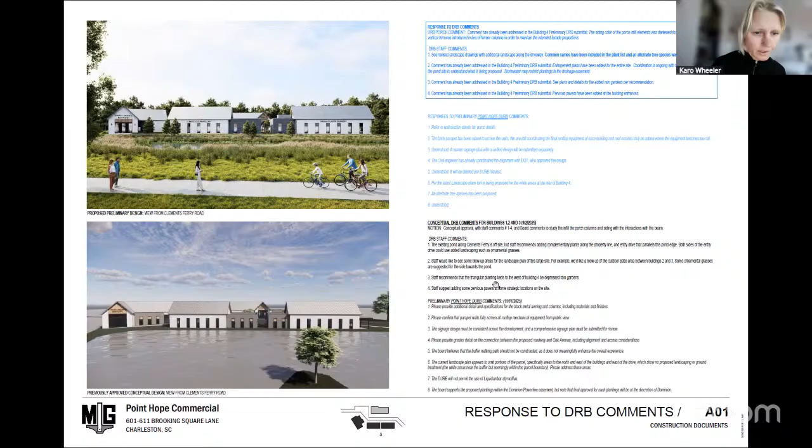So for these buildings 1, 2, and 3, we basically did the same, including the same changes as we did for building 4. From a landscape point of view, we have also addressed comments that we received in December and have added the common names to the plant list, and we selected an alternative for the sweet gum trees and used maples instead. So we can proceed to the next slide as I go through each individual building. Buildings 1, 2, and 3 are here to the south, facing Clements Ferry Road. Next slide, please.

Next slide, please. Here are the streetscape elevations. Again, the face towards Clements Ferry Road has not changed much, but I'd like to dive into each individual building to show the before and after elevations.

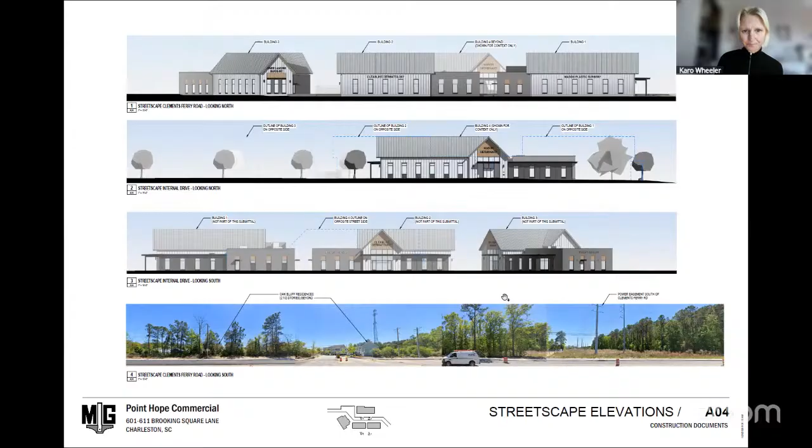We had already presented those materials for building 4 at the last preliminary submittal. Nothing has changed here. We only added the selection for our wall sconces and for the path lighting along the sidewalks. The larger wall sconce will be placed on the gable walls and the main entrances, and we have a more understated light for secondary entrances and egress doors.

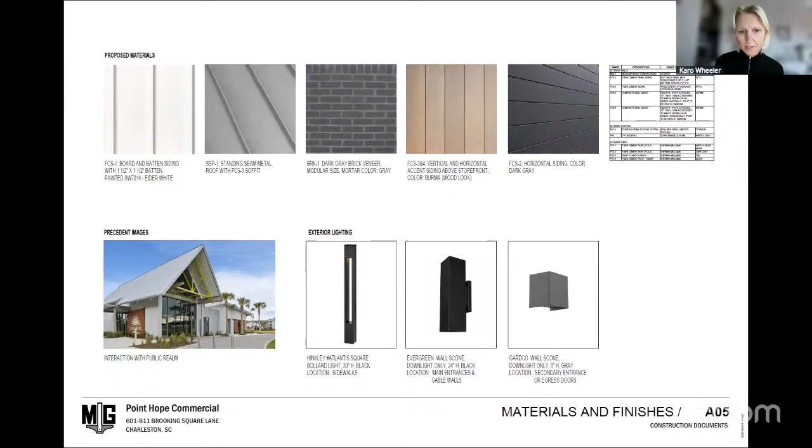We also had to include one change where we replaced the storefront glazing that previously extended up to the roof. We had to lower it because we needed to fit an ambulatory surgery center into the space. The lobby shrank, so it no longer made sense to have glazing all the way up to the roof. We replaced it with vertical wood look siding, just as we did for building 4.

At the bottom you'll see the conceptual elevations, at the top the newly proposed ones. Except for the color change, another change incorporated was the increased brick parapet, which we raised by 8 inches. Those areas predominantly hide the rooftop equipment. For building 1, we also had to add a roof screen since this is an ambulatory surgery center and the rooftop equipment is a bit larger.

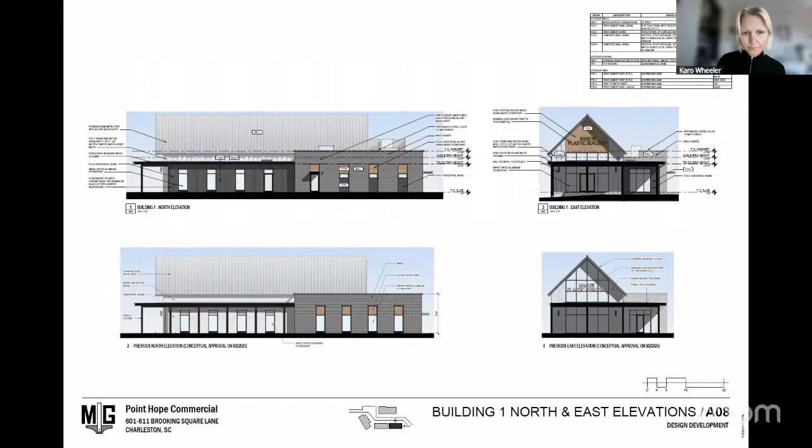Next slide. For the elevations facing Clements Ferry Road, they haven't changed much, as you can see. So we can move on to building 2, please. These are the building sections.

Next slide. This is building 2. At the top you see a comparison between preliminary and conceptual level. Here we also had to, unfortunately, reduce the storefront glazing that previously went up to the roof, down to 17 feet, and again introduced the vertical wood look siding at the main entrance. This way, all four buildings now have main entrances that are pretty much the same.

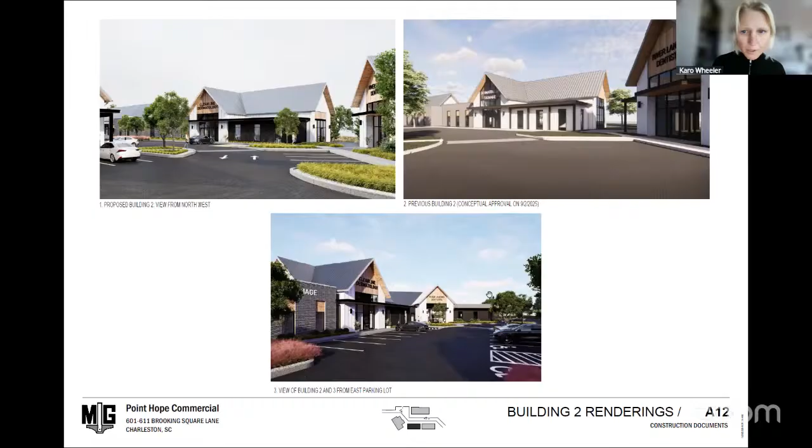Next slide. I'll move on to the elevations. Again, not much change except for the slightly higher brick parapets we introduced. To avoid an awkward situation where the gable meets the higher brick wall, we introduced a small hyphen, which you'll see throughout each building, so the eave of the gable can exist freely without interacting with the brick.

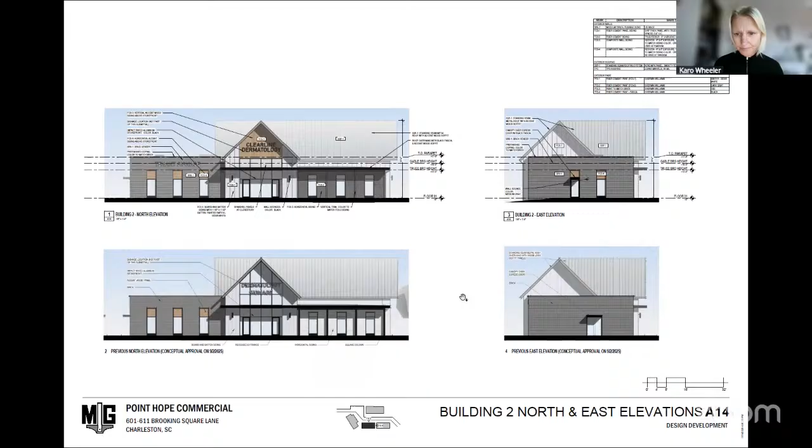Next slide, please. Here the only change is that one of the gables facing the courtyard between building 2 and 3 - we didn't want that gable to look like a main entrance since it really just houses a break room. So we reduced the wood look siding slightly to make this look less important.

These are the building sections again. Next slide. Now we should go to building 3, the last building here. Again, this is the change we introduced to the porch infill element. Next slide. Next slide.

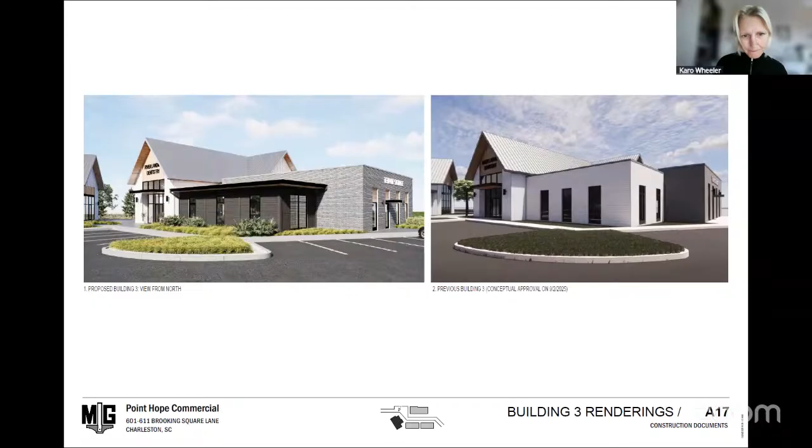As we go, if you could proceed to the elevations, please. So here, as I said, the owner requested a slight change to the footprint, so we had to elongate the building a little bit, but we still have the same elements - the gable elements, the higher brick parapets, and the porch infill. Just slight changes, but from Clements Ferry Road itself, you won't really see a big difference.

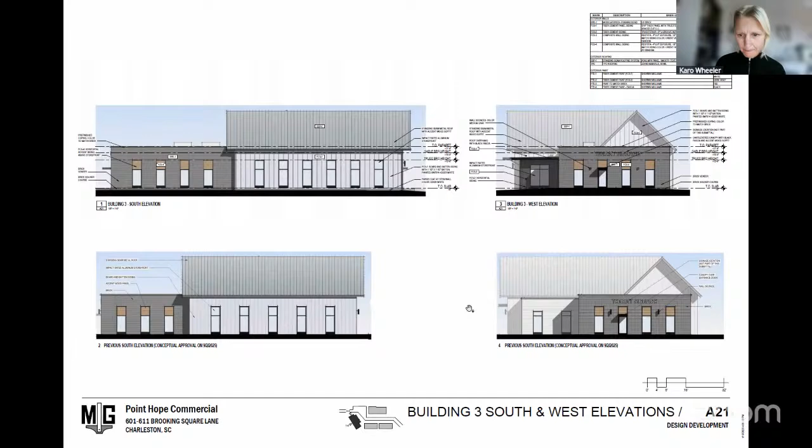Next slide. Now we're showing wall sections that basically apply to each of the 3 buildings. Here's the section through the rake of the gabled roof and the main entrance.

Just the eave detail, the brick detail with the recessed wood siding, and then our infill porch element with a slightly lower roof. The next slide shows the porch element that we have in building 1.

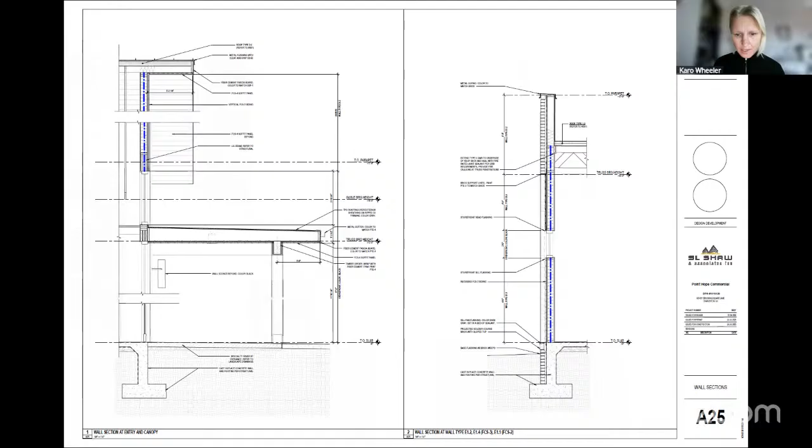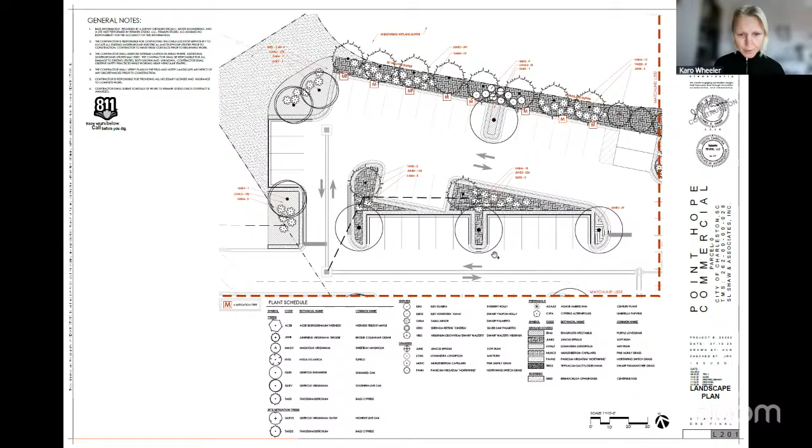I think now we can just move on to the landscape drawings. Again, here we included the common names for the plant schedule, and the main change was the reselection of the sweet gum species to a maple species.

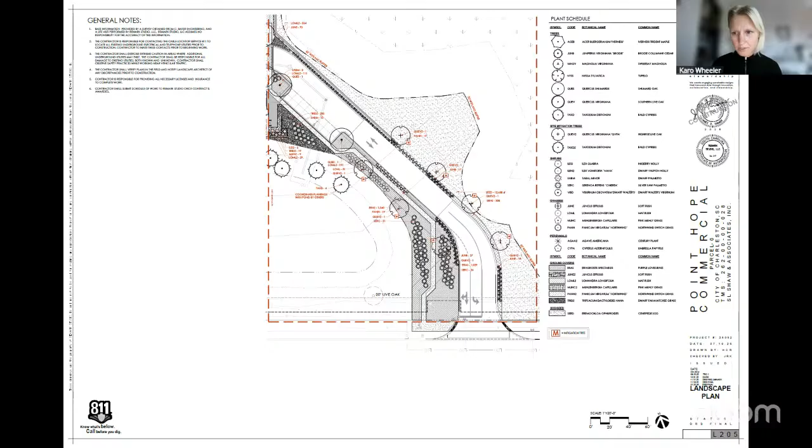With that, I'll have the board ask any questions if anything is unclear. We have our civil engineer Jessica Myers on the line as well, and Carter Ricks from Remark can answer any landscape questions. Great, thank you, Karo. Does anyone have any questions for the applicant?

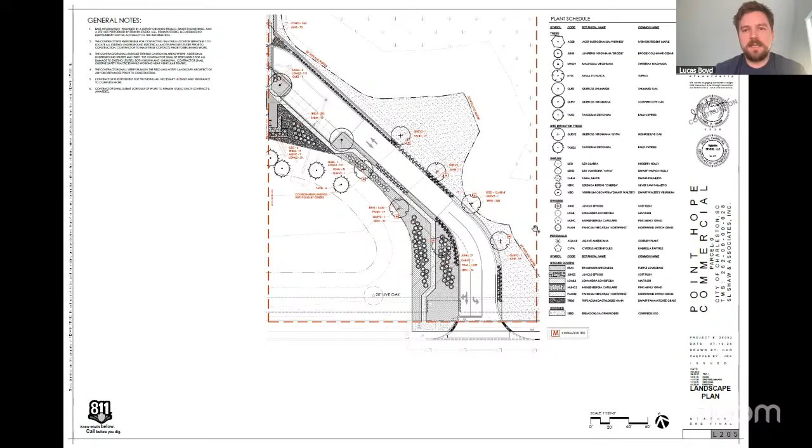I have a quick one. We talked about in the preliminary review for the other building, the change of plane with a material change. I know you had to go to the wood-like siding instead of the storefront at the entrances. I'm wondering if there's that similar plane change, or is it coplanar with the adjacent siding?

So when we are applying, there will be a change in plane. The wood siding will be recessed slightly, the same recess as you can see with the horizontal dark gray siding. In order to achieve that, we have to fur out the board and batten, and that way we can manage that recess. Okay, thank you. So we'll make sure that's also incorporated in the mock-up that we'll prepare.

I just had a couple of simple questions, you probably know the answer quickly. The mechanical rooftop units you mentioned, you had a screen, I believe it's building 1. Yes. I take it you guys looked at the different areas around the site, making sure that large unit is screened wherever you can see it. It looked like on the southern side, looking south, that it didn't have a mechanical screen around it. I take it the parapet is high enough at that point that you can't see it.

Yes, because the street is relatively narrow there. You could potentially see it when you're at the northwestern part of the parking lot. So we can look at turning that around and screening it from all 3 sides. But directly opposite the street, you wouldn't see it.

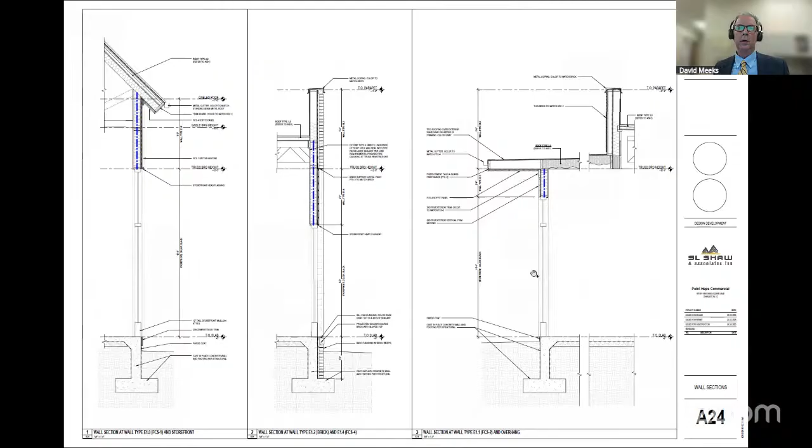All right, I think we are moving on as planned with the second agenda item. Okay, given the great time. All right, agenda item number two, 1647 King Street Extension.

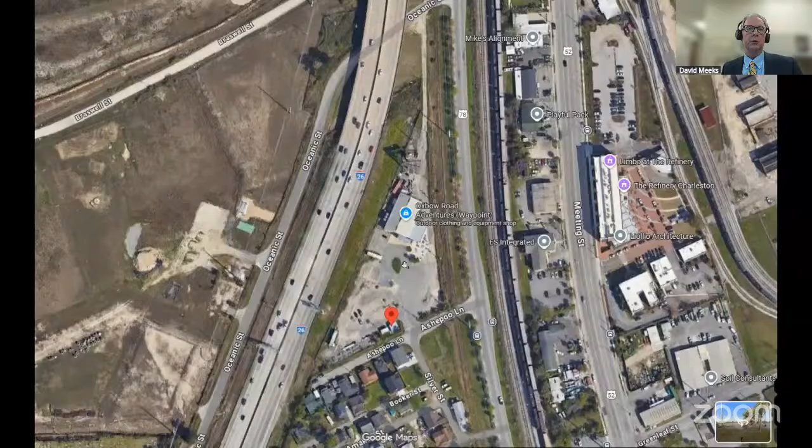Let's see, I have just a few context slides to show everybody where this is. If you see the red thumbtack in the Upper Peninsula, a little closer view. This is where the old Tradesman Brewery was, and it's across 26 from the future Magnolia development.

Closer view, this is looking into the site towards I-26. Again, looking into the site. This is the residences across the street, the site's on the right. And with that, I will turn it over to the applicant.

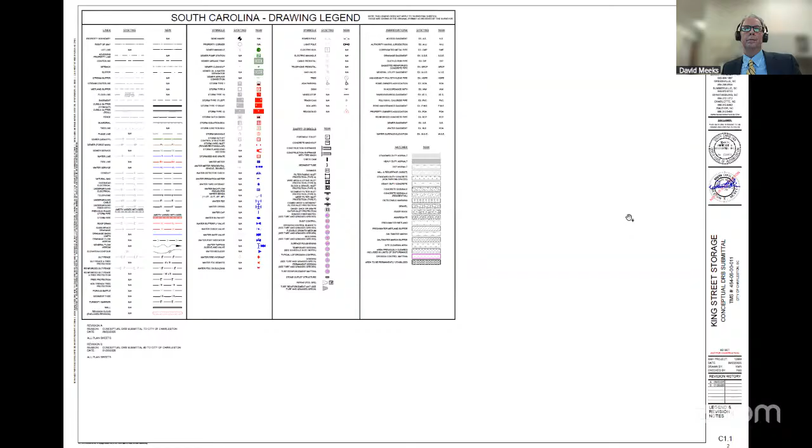Great, do you need more than 10 minutes? Losse, are you muted? Let's see, Losse or Lee? Okay, gotcha, can you guys hear me now? Yes. Losse, do you need more than 10 minutes? Bill, if that's okay with you guys, we'll try to fit it in 10, but we'd like to ask for an extension just in case. Got it. I think Seamon Whiteside and Kaylee Roberts will kick us off with civil and landscape.

And let me know when you'd like me to advance the slides. Hey, this is Kaylee, can you hear me? Yes, thank you. Okay, perfect. All right, if you'll go to probably just slide 8, I'll kick it off real quick with our previous site plan. You guys have seen this before at the previous conceptual DRB. The site layout wasn't exactly what we wanted, and there were a ton of building changes, so I'll keep it quick on the site side and toss it over to Losse after that.

Some of the comments we received were about how the building was placed against the residential area. So we switched that around a little bit and made it a nicer area beside where the residents will be. There's now, and Losse will go into more detail, a plaza area that we're really trying to give back to the residents, to be more inviting than just a big, large building. We've moved the building so that the parking is in the back, which was one of the suggestions from our previous conceptual DRB as well. It'll get hidden by I-26 because it's more in the back, and putting that together with the loading area, keeping it all a bit more hidden and more appetizing to the residents right there.

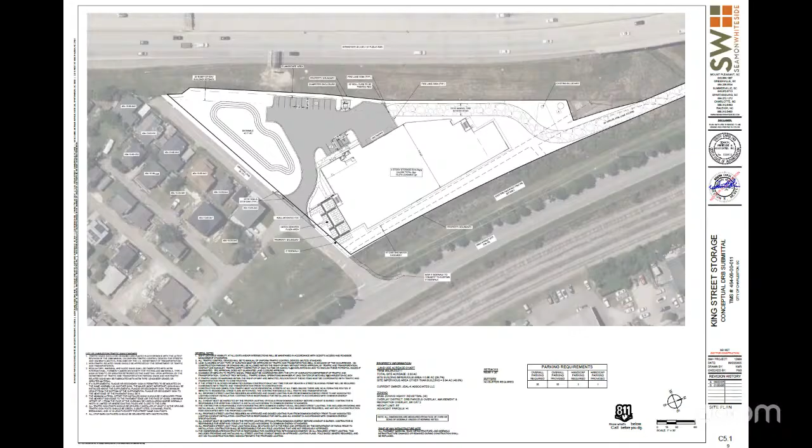Moving to the next slide, one of the comments we received on the landscape architecture side was not having quite enough trees on the I-26 side. So we've added a full landscape buffer area along the parking and pavement, allowing more trees there. There will also be landscaping, bushes and such in that plaza area, which Losse will talk about. I think that's mostly it from the site side.

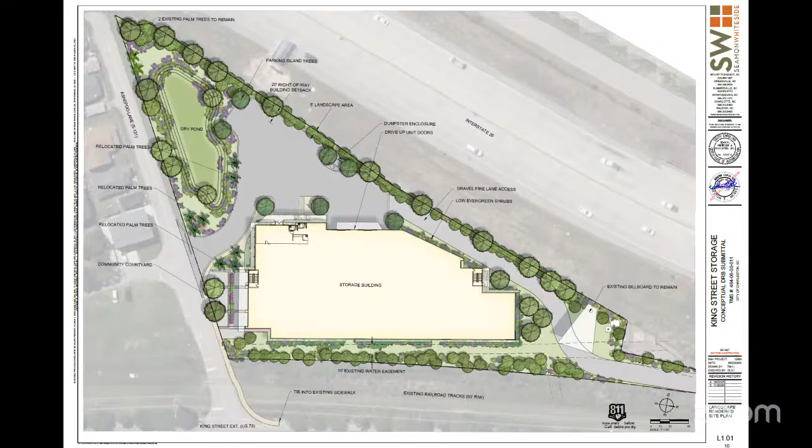All right, thank you, Kaylee. David or Bill, if we can go to slide 29. Sorry, I'm going to jump around a little bit here with the slides.

As LFK Architects is coming on as the architectural designer for the project, we're sort of starting over. I know you've seen some of the earlier conceptual presentations, so for our understanding we went back through the recent conceptual presentation from October, and pulled out the highlights we wanted to take away, which were staff and board comments.

Four primary comments came out of that. The first was that the project needed architectural direction or vision. The second was to be careful of the massing of the building adjacent to the Silver Hill residential community. The third was to consider having parking and loading on the back of the building, perhaps next to I-26. And finally, using landscape and canopy trees to scale down the massing of the building.

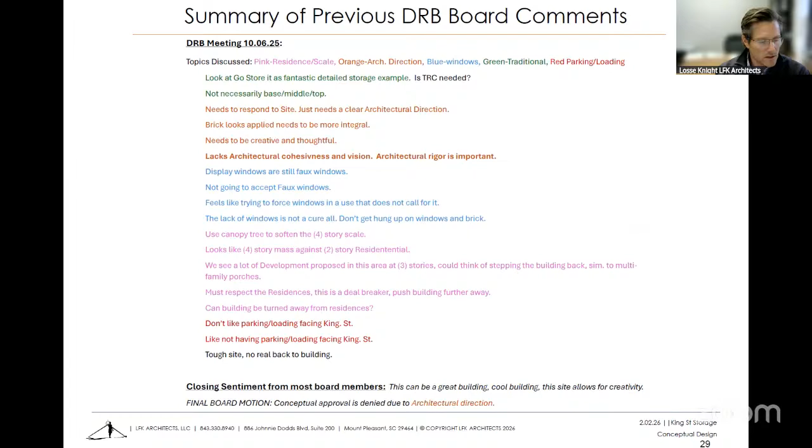So this is part of us getting up to speed on our end. If we can switch over to page 13, we'll have to back up a little bit. Just wanted to hit on our site analysis and our larger look at the site context.

As you can see, our site is here on the neck area of the peninsula, and this neck area has been a transportation spine serving the peninsula for years. Our site has been defined by rails and the automobile, with I-26 coming in around 1960, squeezing that side of the site. Then we got the King Street Extension and all the railways that happened in this area.

If we go to the next slide, you can see our site on the left there, reacting and responding to the industrial nature of the site. On the upper part of the image, you've got Chevron and Kinder Morgan, and some of these larger bulk shipping and receiving uses.

As you work down the page, you can see the train, which runs right along the King Street Extension, separating Meeting Street from King Street Extension. It's really three tracks there, plus another track adjacent to our site that's abandoned. On the right side, we've got the Ford's Ready Mix plant, then the Coastal Electric Company, and then Silver Hill.

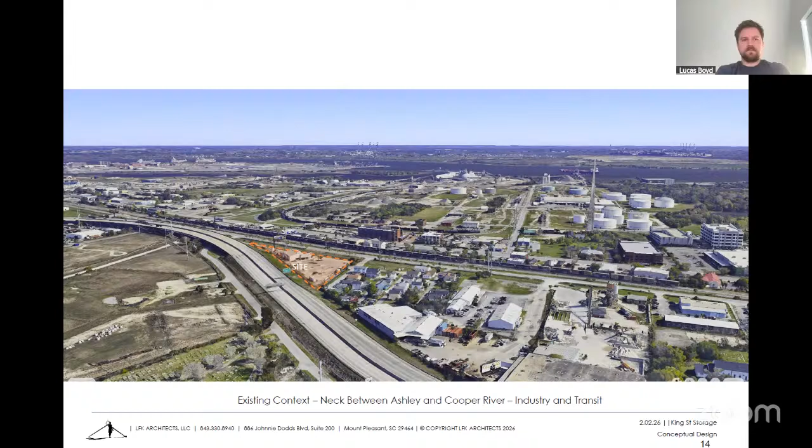Looking at these trains, buses, and cargo ships happening in this area of the neck, we wanted to use that to help influence the architecture. You'll see some of these forms come out in our theme a little later in the presentation.

Just to recap, we did an analysis and found it fascinating—we've got nine railways literally within a stone's throw of our site. We kept evaluating what this means for a site that's in motion, with I-26 passing over 100,000 people every single day. So this is a kind of transit mapping we wanted to react to and incorporate into our system as we move forward with the design.

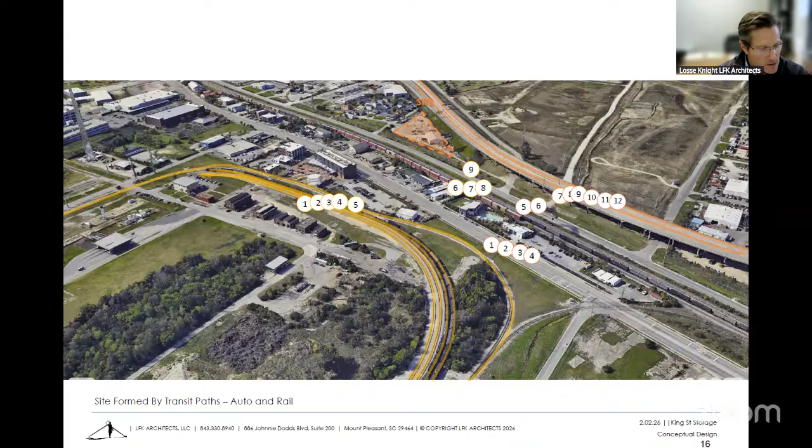If we can go to page 23 and jump to the street level site context, I just wanted to show it to you at sort of a street level or vehicular level.

So the top image is at Atlantic Coast Electrical. As we progress, we actually get to our site, which is the bottom image.

Really interesting, there's always been a building here since the late 60s. It seems to have always had sort of an industrial use. We found an image of BW Mitchum Trucking that was on here, and the site was full of these cargo units. So we thought it was fitting that we're proposing this self-storage cargo vessel that organizes and packages these things nicely on site. And then it went to a Sunbelt, and more recently it's been the Tradesman Brewery.

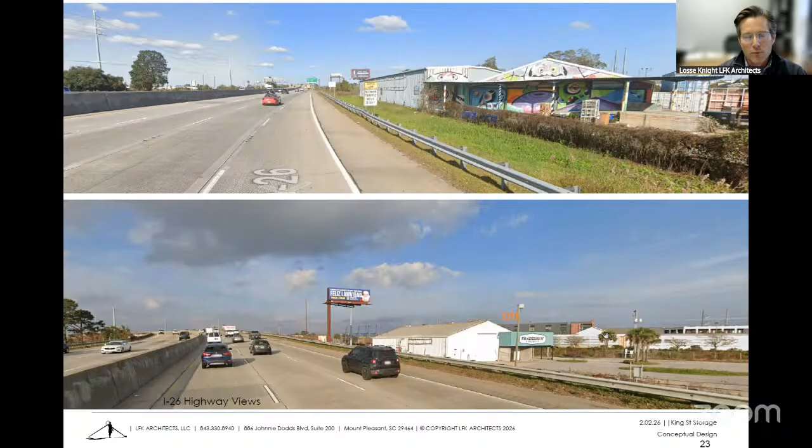This drive is actually going to be turned into the future Magnolia Landing, and will no longer extend to King Street, but we'll be able to use it for gravel access to get a fire apparatus to our site. We've been coordinating that with Mr. Rick Flugie. So just a little bit on site context that kind of influenced us.

If we can go to page 32, please. All right, so just wanted to kind of quickly hit on the previous and proposed. I'm sure you guys remember the previous submittal.

We wanted to respond to the board comments. We wanted to respond to how we felt about spending time on site and where the site analysis led us to. And so getting the building to front King Street Extension really opens up the back of the building, opens up sort of almost like a garden-like space along Ashepoo.

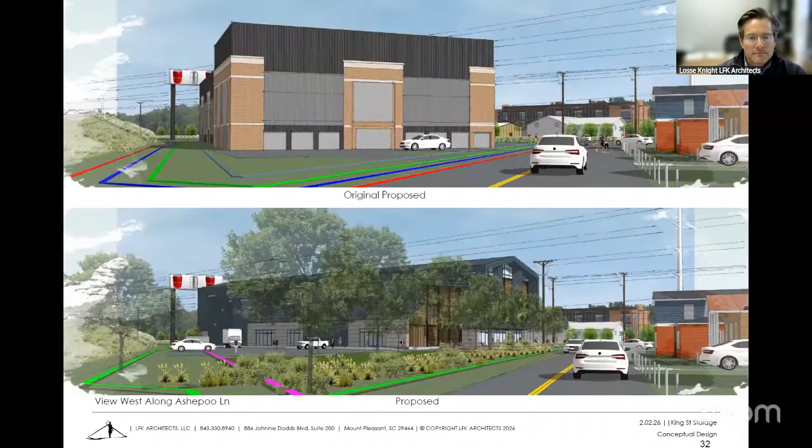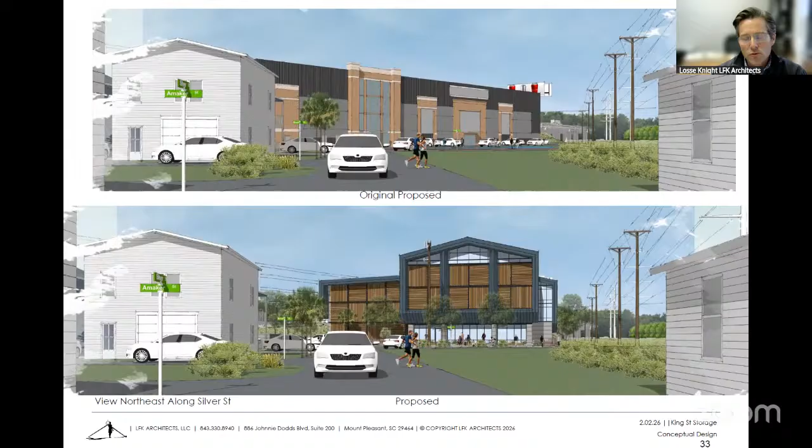And then this is looking from Silver Street. So the building is now centered on the right, sort of an open green space that happens. Monrovia Cemetery owns that. The building is no longer positioned in front of the residences. We've also provided a big 2,700 square foot public plaza out front of the building, which you'll get some better images of. So just wanted to give you a quick reminder of previous versus proposed.

So if we can jump to page 39, that'll be the building plans. All right, so quickly wanted to show you a little bit about the building program.

We got I-26 to the top right of the page, and it cuts through the site, and it really helped to shape this sort of wedge-like form on that side of the building. We have that plaza on the left, and the building fronts this CWS easement, and it fronts King Street Extension as much as we can. Parking and loading has been moved to the back of the site.

We've got a primary office right off of the parking area, and if you follow the primary office north-south on the page, we have a hallway which connects us to these show units. So the show units actually front on the plaza, and we wanted to take potential renters to that area so they could see what size unit they might need. This is when they set up mattresses and furniture in different size units, and they're basically the show units.

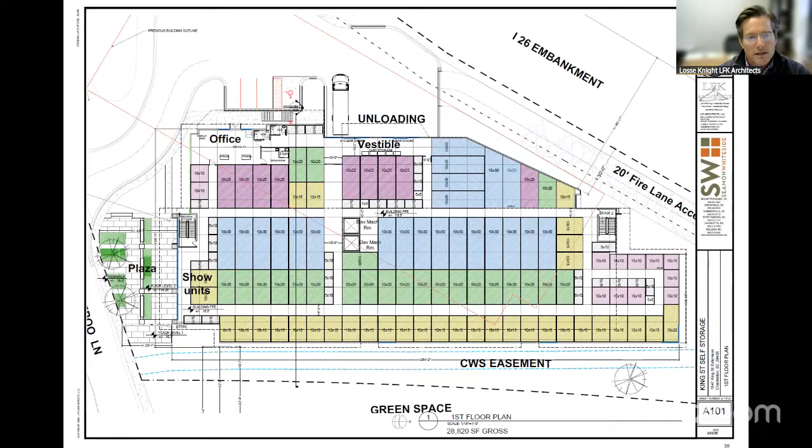Elevator core happens in the middle of the building, and then we've got these vestibules and other glazing that's aligned to bring light and a wayfinding perspective into the core of the building. Next slide, please.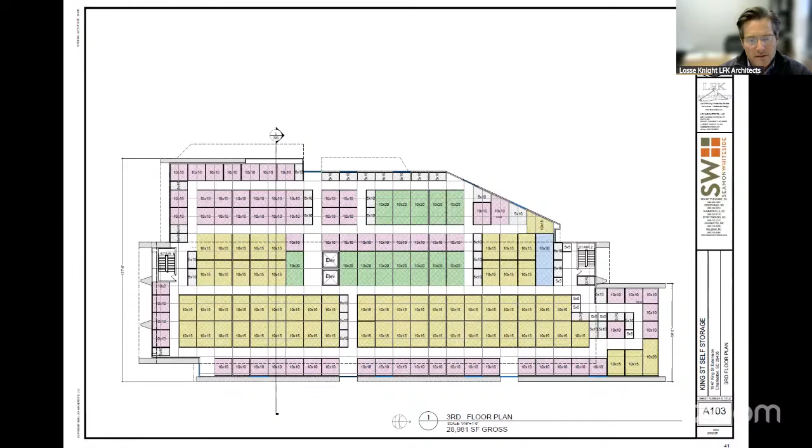So when we go to the third and fourth floor, you're going to see a thickening of the walls, kind of a poche in the walls. That's really us trying to show this building floating up on this masonry base, this building in motion, this vessel that starts to show itself in that third and fourth floor. And then when we get to the fourth floor, we've actually reduced the square footage and stepped the massing down to where we have this one primary gable-like hull form.

This is a really neat space. We've got tons of light. We've got 60 feet of glazing on each end that gets natural light into the spaces. And then there's windows that happen about every 20 or 30 feet. The windows are 10 feet long and about 20 inches high. Some of the other hallways are really centered on important hyphens and other breaks in the architecture to allow light into the core of the building.

Let's go to slide 44, please.

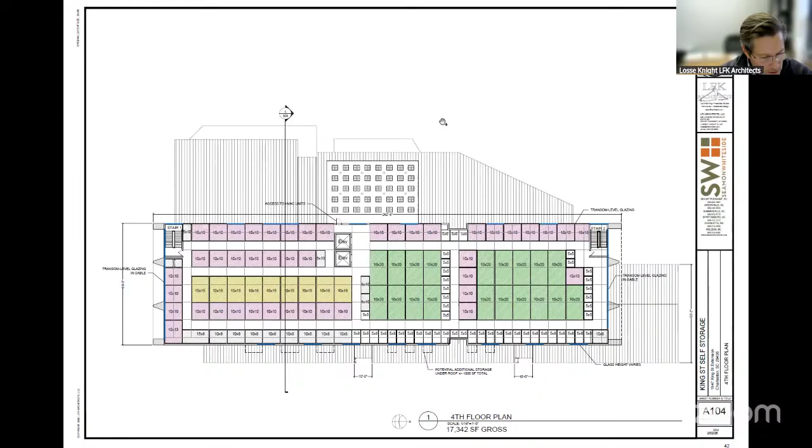If we can go to page 45, please.

Just an overall bird's eye view of the plaza as it fronts King Street and Ashepoo, and that kind of green park-like space in front of the Silver Hill residences.

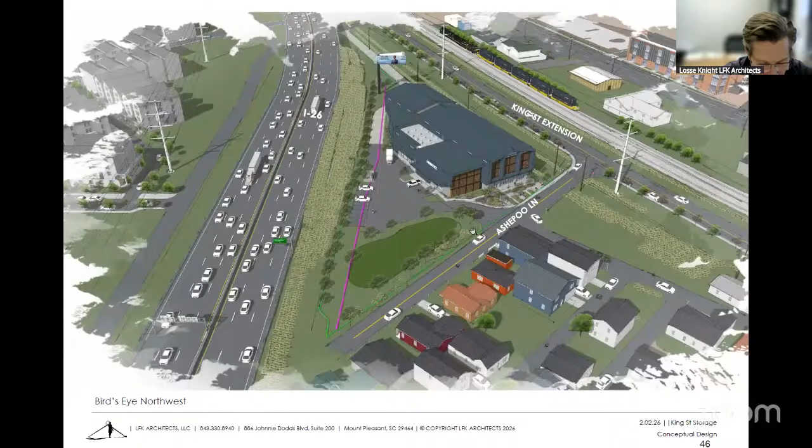This is the view looking towards the Ashley River. Again, you see this double stack railway, and our building is very much influenced by that. You can see the building hovering up on this masonry base. We have about 90 feet that separates our building from King Street Extension, and all that's just an abandoned railway and greenway space.

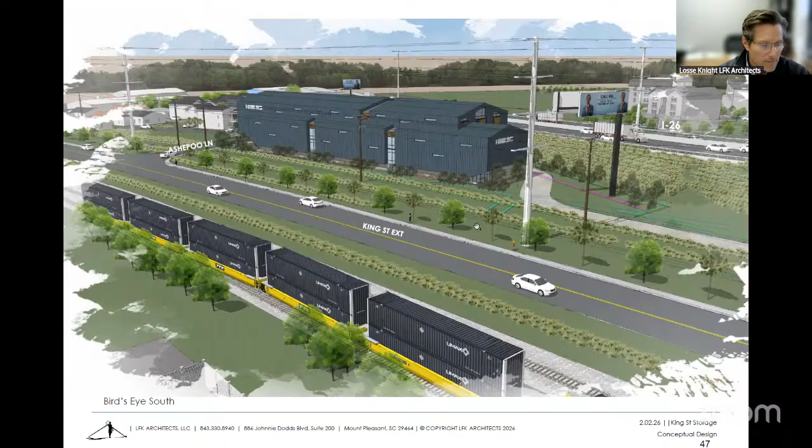This is our view more south, tucking the building under that big billboard and having this graduating form that responds to the shape of the site.

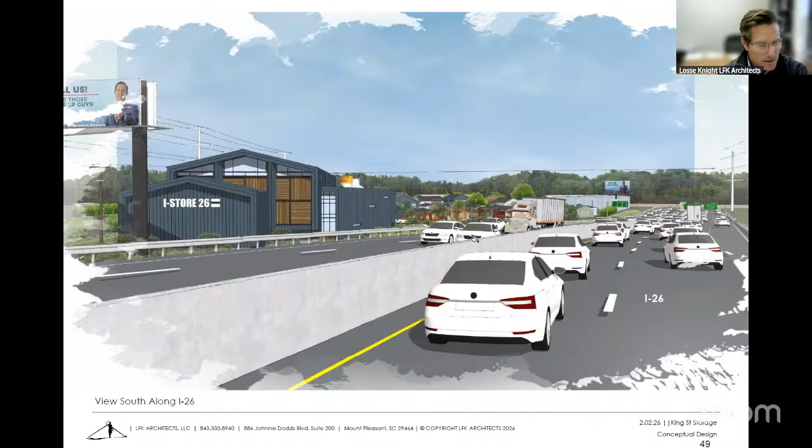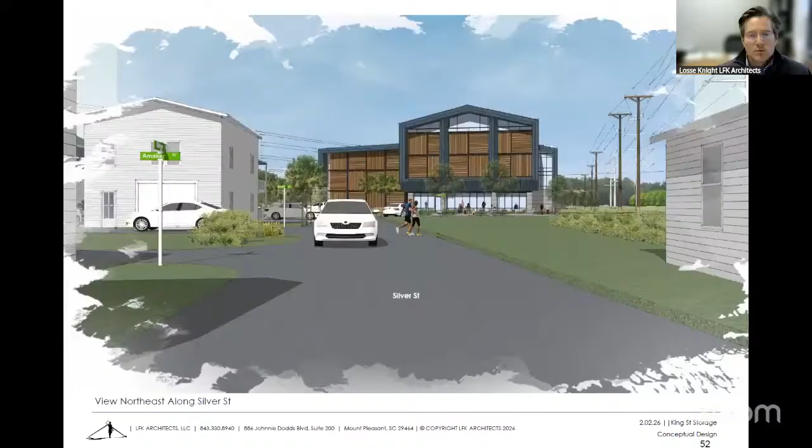Okay, if we can jump to 56, I think that's the material palette. Oh, I'm sorry, if we back up one slide.

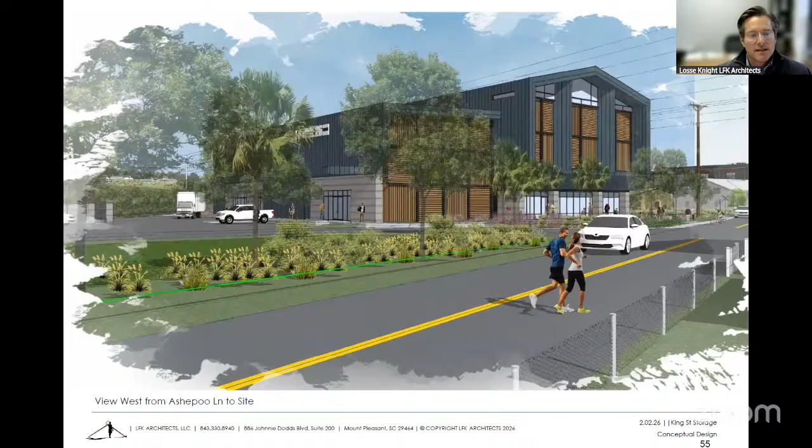So this just finally clears the landscape so you can see the rear of the building where the loading zone is. We have this cantilevered form of the skin of the building that extends out to provide some coverage. And of course, we have these implied basket weave type storage containers that are contained within the overall vessel of the building.

When we were on site, we saw a number of people in that little greenway space between the King Street Extension and our site. So we really wanted to create a nice programmed outdoor plaza that could be used by the community. Next slide, please.

Okay, I think we've got a lot more technical information in here, so I'll stop talking. If there's any questions, happy to answer those.

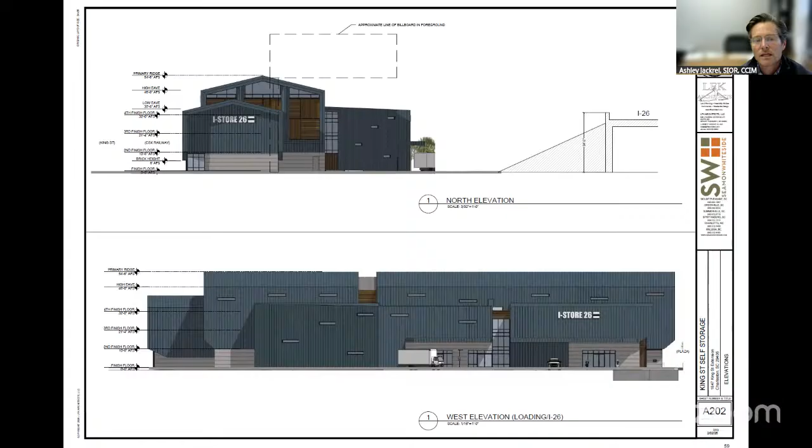Ben, did you want to go? I have a question as well. I can't hear, we can't hear you. I'm not sure if you're saying anything. You guys can hear me okay, correct?

Yes. Okay, and like Ashley, I don't bring a commercial real estate perspective, I bring probably more of a planning perspective. So Losse, I have a question for you, and I agree the conceptual design of this building is much improved, and I think the historical piece and your detail as to why you guys designed this is great. When it was lined up, when I saw the train and the side view of the building, it just looked very natural with regards to that area.

From a planning side, though, from my standpoint, just so I understand the public space that you were talking about, one, you kept referring to the cemetery ownership. So is that adjacent to this little plaza you're creating? Because I'm not sure from a community standpoint, I don't know if you guys went to the community and asked. I don't know if this is going to be used that much, honestly, by the community, not unless there's another space that may be more like an open soccer field or something that could be used by the community.

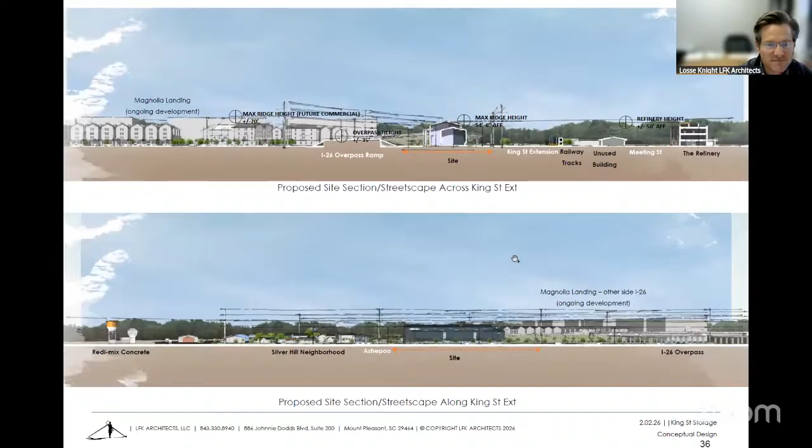You can see that green space right in front of the building along King Street Extension. From our research, that space is owned by Monrovia Cemetery, not actually owned by the community or the church there. At one point it extended across under I-26 to the existing Monrovia Cemetery on the other side. So we're not sure what's going to happen with that property. We don't know if there are any grave sites there. It seems like it's been really well protected over the years, and no one's really doing anything but mowing it.

So our plaza area sort of aligns with that open green space. We were really trying to get the building to front King Street and not loom over. Previously, the building was sitting on the back of the site, really in front of maybe 5 or 6 of the homes along Ashepoo.

Okay, thank you. Can y'all hear me? Can you hear me? Yes. All right, that's all right, getting some technical difficulties with Zoom here.

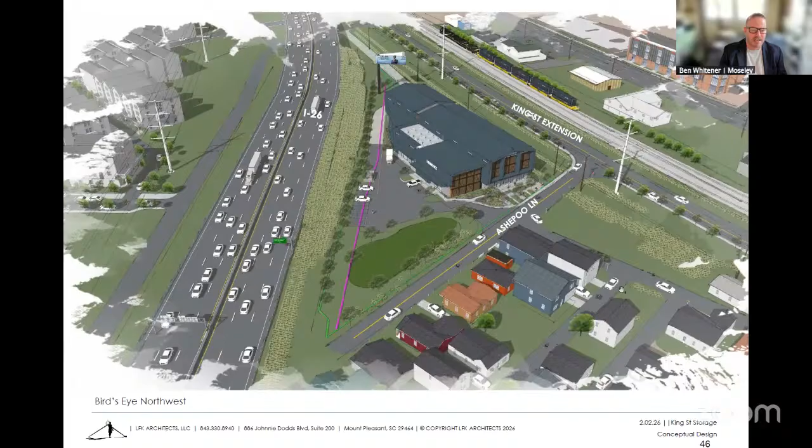Just a couple of questions. First, is there a reason you couldn't have glazing on the ground level, the pedestrian level, on the King Street extension side? Looked like you had a couple of spots, but I was wondering if you could introduce a bit more, since you said there are a lot of people who gather there already. That's the first question. Second, I'm curious if you looked at reducing the massing on the northern side to more of a 3-story mass, similar to what you did on the southern side directly across from the 1- and 2-story residential units.

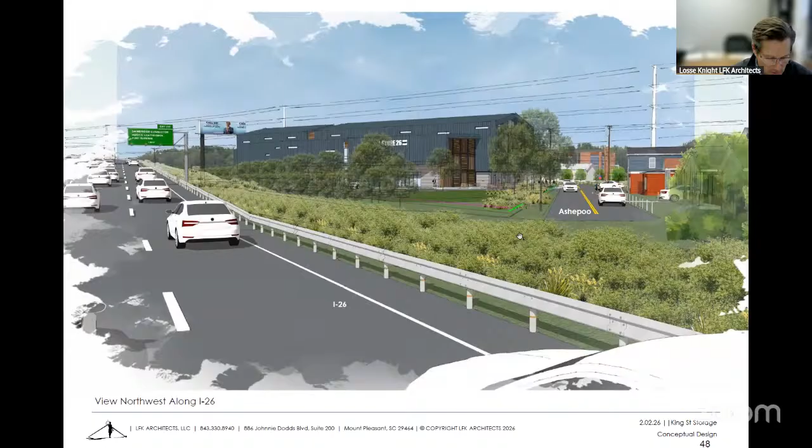As far as the windows or glazing goes, we felt it was a balance. If we could go to the King Street Station elevations - yeah, that one right there. It's a little deceiving: the glazing you see, the hyphens that break up the larger blue massing of the building, are about 10 feet wide and close to 25 feet tall. So there are substantial openings and glazing in the building.

We could possibly consider more glazing on the ground floor. It's a little screened from King Street, so we tried to emphasize and put everything toward the plaza at the intersection of Ashepoo, where we'd have more people gathering. That was the thought process there.

As for the other question, if we can go back to the best image for that - essentially we've moved the building about 45 feet away from the residences, and we've also scaled down that side of the building. It's been scaled to 3 stories where previously it was 4 stories. If we can go to slide number 32, that would be helpful.

So here's the previous and proposed. We were trying to graduate and change materials to soften that side. There's also going to be a lot of landscape on that side, between the building and the residences.

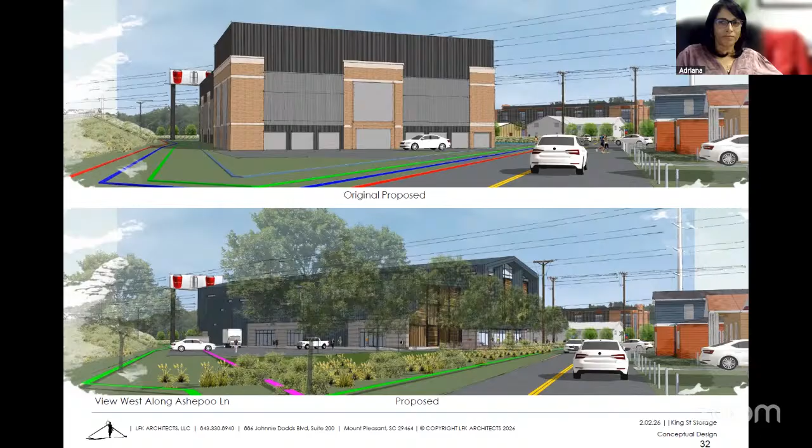Any other questions of the applicant? If not, we can go to city staff recommendations.

David, you're muted. Thank you, sorry about that.

Some staff observations. First, the previous building design for this project was denied due to architectural direction, as well as the building placement being too close to the residential area. The new architect has worked with various city staff to come up with a new concept for the building design and placement. An earlier building concept had less windows, and staff had asked to see more, which the applicant has provided.

The applicant provided context photos of common sites in this area as inspiration for the building design, such as ships carrying containers and trains. Staff can agree with this as a strong concept and design direction.

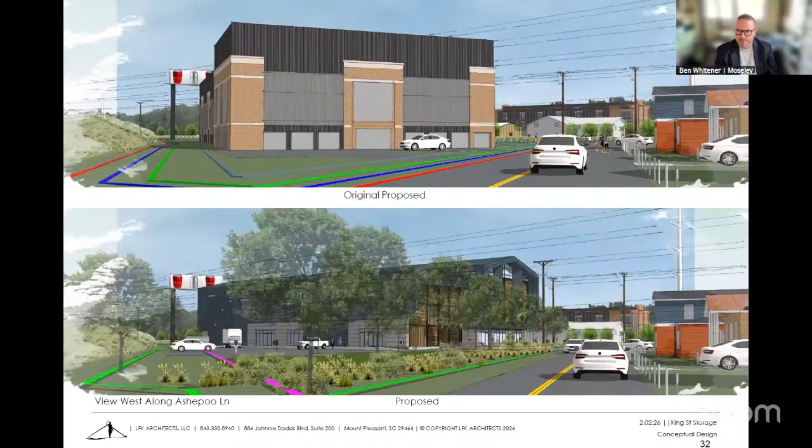But I agree with Lucas, the height, scale, and mass is appropriate for that area. And the architectural direction, I feel like you're going down the right path. The windows - I know you're in a bind by not being able to push the units off the envelope, so there's going to be glass glazing in the storage units. But I applaud you showing that there are going to be windows on those elevations. A lot of times we have folks come in and there are no windows, and the answer is we can't put windows in there. So I really applaud this effort, and thank you for the deep dive into the site and the context.

Yeah, I agree with that too. I agree with Ben and Lucas. We denied this on height, mass, and scale and architectural direction before, and I feel like all those comments have been addressed. I think this is a much more context-sensitive approach than what we saw before. I agree with Lucas that some of the architectural details could be simplified, unified a little bit, but as far as architectural direction, it's a strong concept.

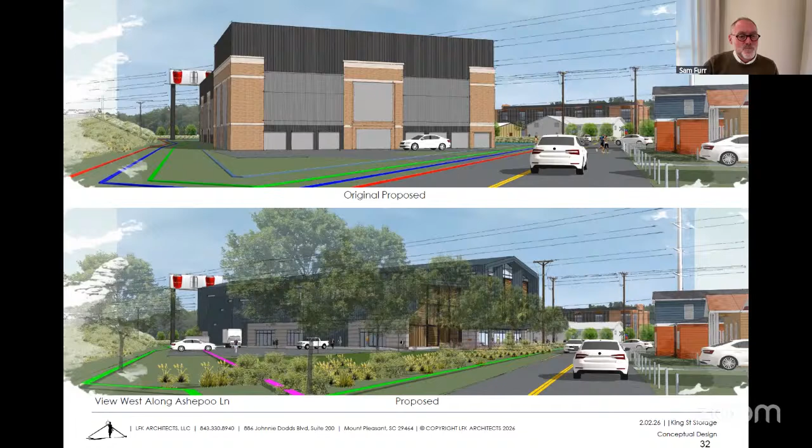I'd like to comment. I do like it architecturally. I think it's doing great, but I think the best contribution to the community would be making sure you beef up that landscape budget just to soften it from all sides. I think the community would benefit from that. I think you've done a very good job with the building. Now it's time to set it in a much gentler context. That's all I'd say.

Anyone else? Let's make a motion for conceptual approval with staff comment 1. We second. Okay, Ashley, second. Any discussion before we vote?

I do want to touch on - I don't think it needs to make its way into the motion - but a kind of refining of the architectural expressions has been understood. We've discussed it, and I think we're in agreement. But do you guys think that should make it into the motion? I think they heard you. Yeah, and same with my question about the gravel versus the reinforced lawn. I'd like for them to explore that, but I don't think it needs to be part of the motion. It's all beyond conceptual stuff anyways.

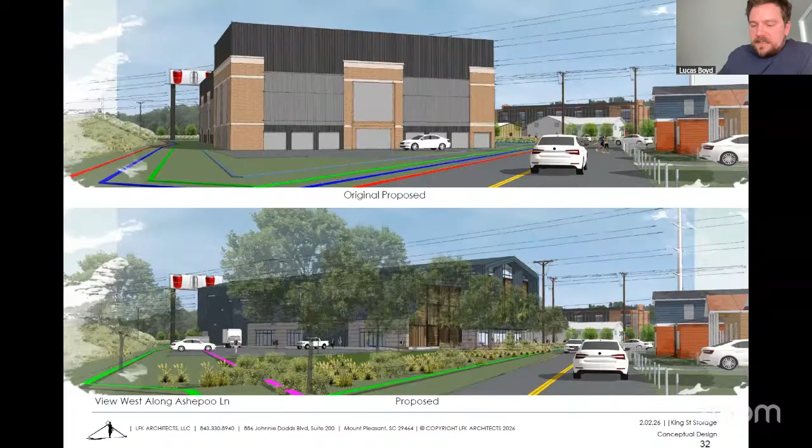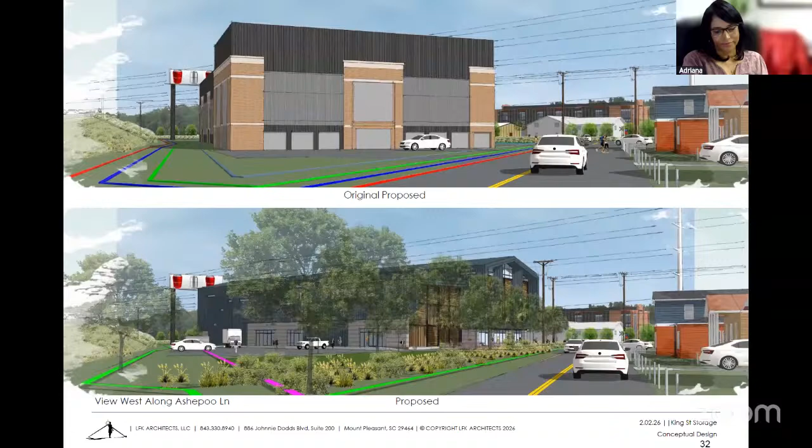All right, are we ready to vote? Sam? Aye, yes. Lucas? Yes. Stephanie? Yes. Adriana? Yes. And I'm a yes. So motion passes. Thank y'all very much. Great, thank you for the effort. Thank you, guys.

All right, we're ready for agenda item number 3, 3550 Maybank Highway. I just have a few context slides first. The red thumbtack is on Maybank Highway, close to the main road intersection. This is adjacent to the existing park in Johns Island. Here's a closer view with the red thumbtack. This is the existing park, which it will be a part of. This is looking into the site - we're going to keep the existing drive here, and it's actually more off to this side. But behind the trees, this buffer is going to remain as well. So with that, I'll turn it over to the applicant.

I'm not sure who's going first - is that Zach? Hey David, this is Zach, how you doing? Good, thanks. So we have David Meeks with LS3P as the architect, and Craig Clements with Satile as our design assist, and Mary Tweel with Seaman Whiteside as our civil. And I think we also have the mayor on here, who might like to speak to this, so I'll hand it over to whoever. Sure, thank you - if the mayor is available, we'd like for him to speak first. Sure, I think I'm unmuted - everyone can hear me all right? Yes, thank you, we can hear you. Great.

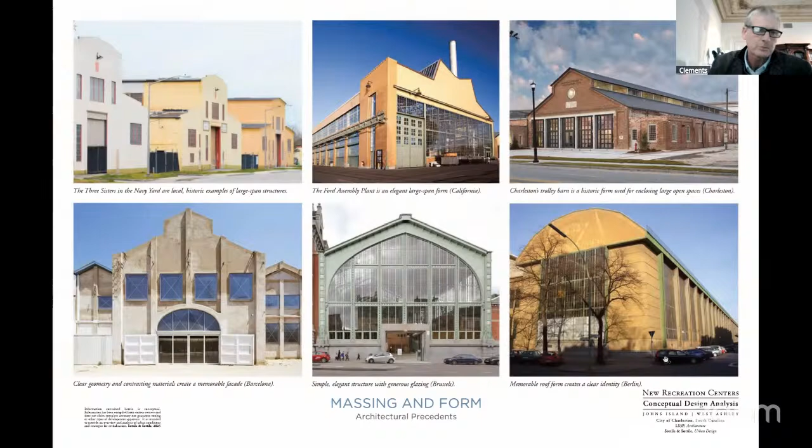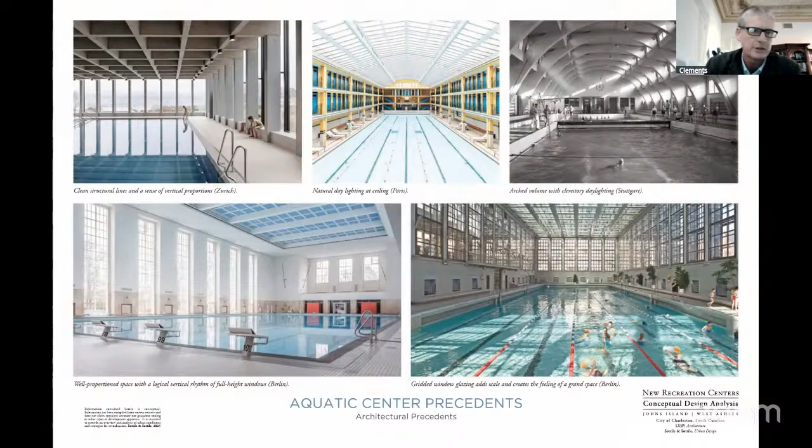Imagining again what some of those interiors might look like — you can see the tall vertical windows, particularly down in the lower left-hand side. That was inspirational to us. Next slide.

More of those precedents for this kind of architectural language. Next slide.

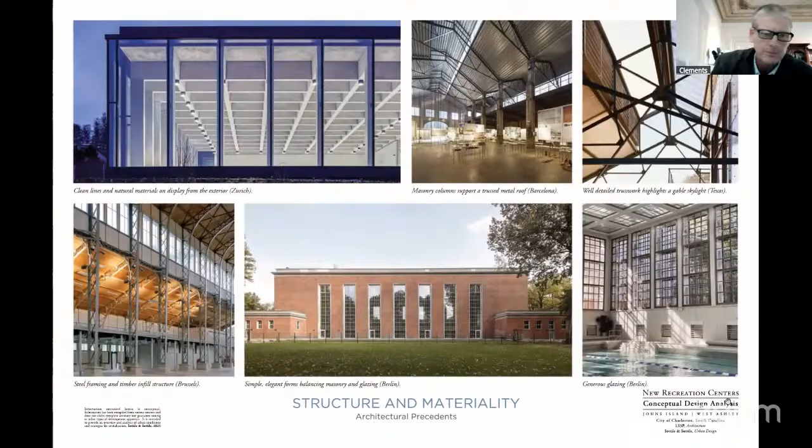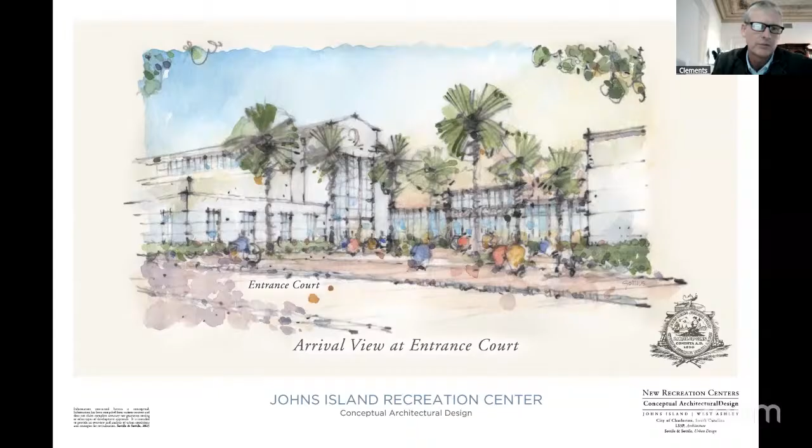And with that, I will turn it over to the team at Seaman Whiteside and also LS3P to talk about site design and further architectural development.

Thank you. Thank you. Is Mary on? Hey, I'm here, David. Okay.

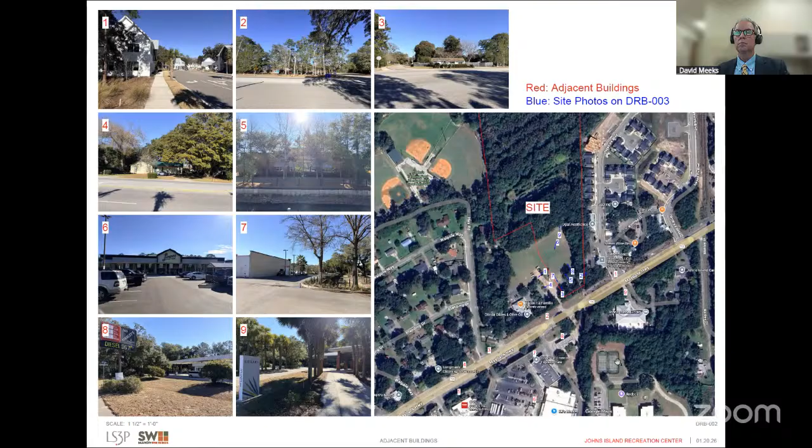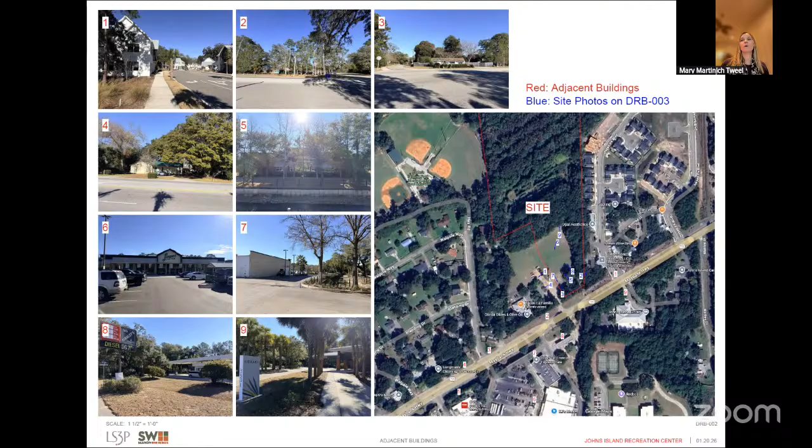I'll talk a little bit about the site and where it's located, then we'll get back to more detailed architecture. It's located along Maybank Highway, as previously mentioned. The architecture around the site is a little more low country style. You've got the library to the south of it, so you can see the character—it's very rural with lots of trees located around, which you'll see in the next slide as well.

The front of the site has a natural wooded buffer, opening up to a lawn, and the back is pretty much wooded. You've got water oaks, red oaks, and gums throughout the site, so it's pretty much a wide open space. There's a local chiropractor's office shown on slide 4 that we'll share an entry drive with, which I'll dive into more—it's an open space with mostly wooded character.

We're working with roadway connectivity through the site, as well as trying to locate that building as close as we can to Maybank Highway so you get that civic presence as close as possible to people driving through Johns Island. We have a 75-foot required front buffer, and we're going to use the existing trees that are already there and supplement with understory planting, trying to keep it as rooted in place as possible.

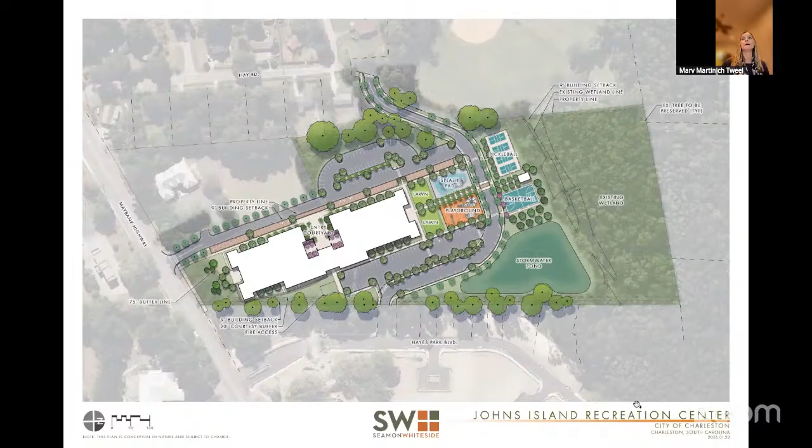For the overall vision for the park, we're trying to get the building as close to the front as possible, with that road needing to connect through. We wanted to provide external open space elements that also complemented the aquatics and gym components inside the building. As you come in off Maybank Highway, that's a 2-lane entry drive. We've got nice pervious pavers at the front to help with stormwater but also to help elevate the front entry. That courtyard brings people in, primarily paved, but we could have some signature palm trees really enhancing that.

That will include some spill-out space for the meeting rooms, or if you're going to basketball, it's kind of a casual community gathering space there. As you go towards the rear, it's organized by a central axis where all of the open spaces are in one central area. You've got 2 lawn spaces that could be used as a potential farmers market, or if you've got a swim meet, people can hang out there. A splash pad and playground are centrally located next to each other.

That central axis takes you across the street to four pickleball courts and a basketball court with a shared pavilion in between. We've got associated stormwater, and then tried to incorporate parking as much as we could around the site so that people had lots of different options of places to park.

Also really strong connectivity with sidewalks going adjacent to the residential areas and also to the existing park, so we can be well connected to Johns Island and provide other ways to get to the park besides driving.

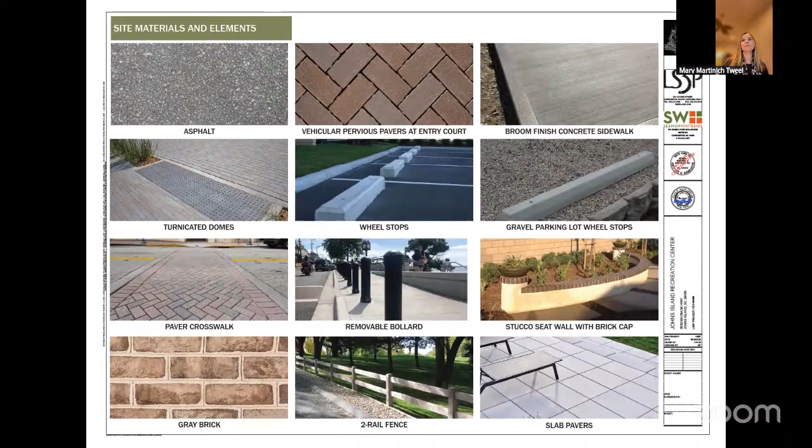A few of the site materials we're looking at—really wanting to enhance it with those vehicular pervious pavers as you drive in, having pavers in the crosswalks to help with pedestrian visibility and safety, and then incorporating a low wall in the front of the building for a little bit of open space outside of the aquatic facility.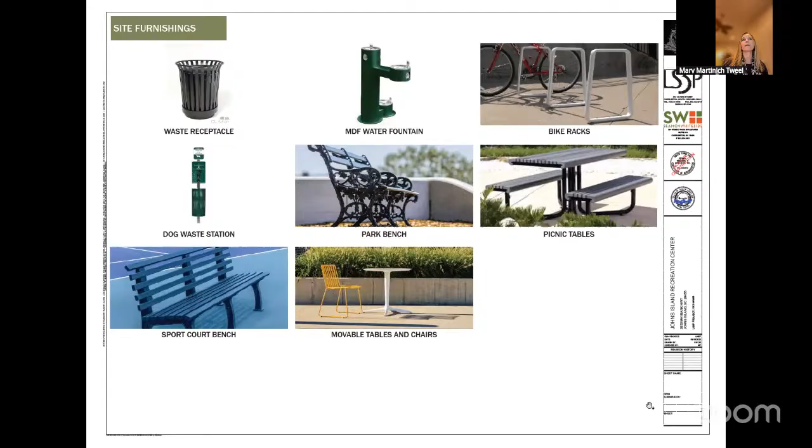We're currently working on the details of the playground, trying to make that a really signature element for Johns Island. I don't think there's a whole lot of recreational options out there, so this will be a really nice element we can bring to them. Looking at the basketball courts, potentially using paint as a way to elevate it and really make it feel special.

There's a couple splash pad images, really looking at more interactive water play elements that work with the playground as well. So that'll be a fun one to bring out there.

We do want to work as much as possible with the native plant palette, incorporating some really nice signature live oaks, southern magnolias. This is a park, so we want a nice diversity of species—could incorporate tulip poplars and black gums.

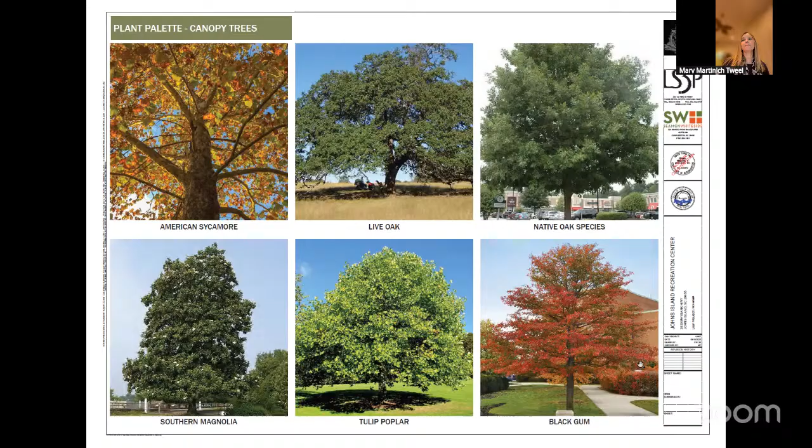I had mentioned potentially doing some palm trees at that entry courtyard—it'll be mostly paved, but really trying to make a strong statement while still being able to see the building. You can use palms to enhance that entry, using some more smaller scale plantings around to soften the overall building with some understory trees.

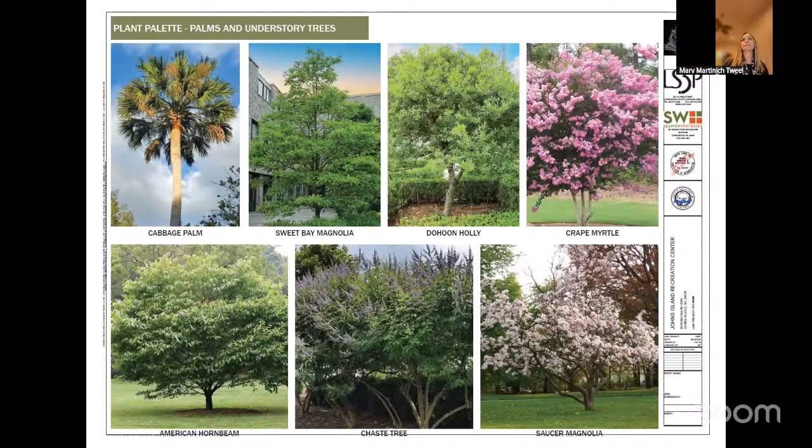And then finally using some more native shrubs that work well, like Florida anise, hydrangeas, beauty berries, using sweetgrass as much as we can. We're working with the city to provide low maintenance areas, but really trying to make them as native as possible. We've had some success seeding the pond banks with purple lovegrass, so we'd like to vegetate the pond banks and reduce the mowable areas as much as possible to really enhance the diversity of the site.

And I'll turn it over to David to talk more about the architecture.

I know we're running short on time, so the design didn't change that much from where the charrette started—we've really just dug into the details. So I'm just going to quickly go over these. There's been lots of discussions about the pools, how they're functioning, the depth, and all of that. We worked very closely with the community to make sure we're achieving all of the pieces and parts programmatically in this building. I've got a couple of classrooms and some meeting spaces off of the main lobby there.

To the right, we have the aerobics room as well as a little fitness area and the gym. To the left, you've got the warm pool, therapy pool, and then the larger aquatic swimming pool, as well as the locker rooms and the administrative offices. You can go to the next one.

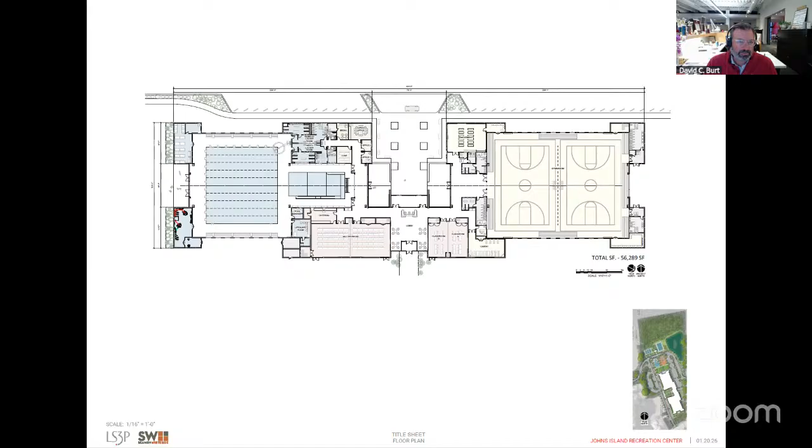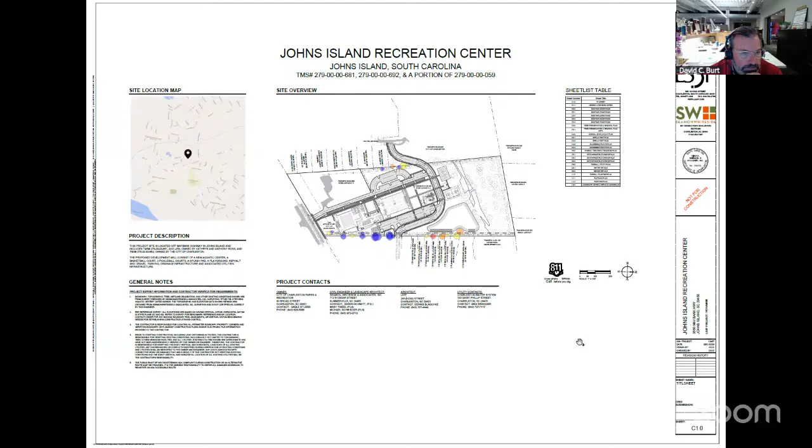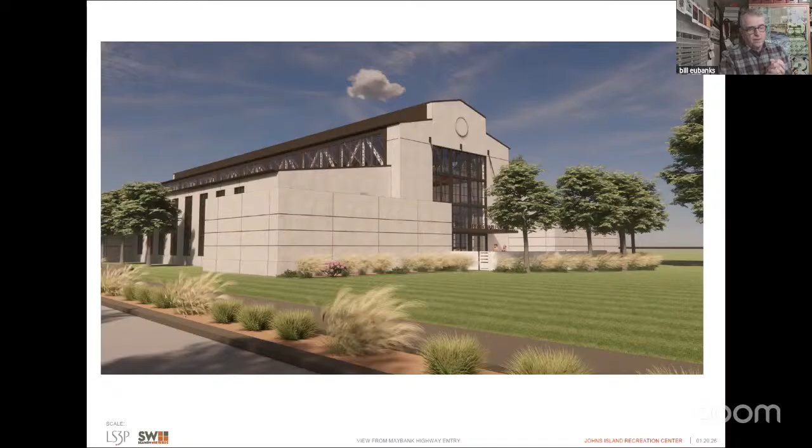The site plan, the landscape plan, everything looks fantastic as far as I'm concerned, it looks really great. Although I do have two concerns, which I'll go ahead and mention, and that was using sycamores and magnolias as street trees. I just don't think that those are probably the best choices. The sycamores, although they're beautiful, tend to be a little bit brittle and more susceptible to storm damage, so you might want to look for a substitute for those. And the magnolias as street trees, I just think the character might not be right.

But my question is, I know you've got to go to BZA-Z for the height issue. Have you been to BZA-SD yet for the tree removals? She's still muted. Somebody unmute Mary.

While she's getting unmuted, I can tell you we have not. No, we've got to go to BZA-Z next month for the height as well as the parking analysis, but both of those are the only items we've been told that we need to take to BZA-Z.

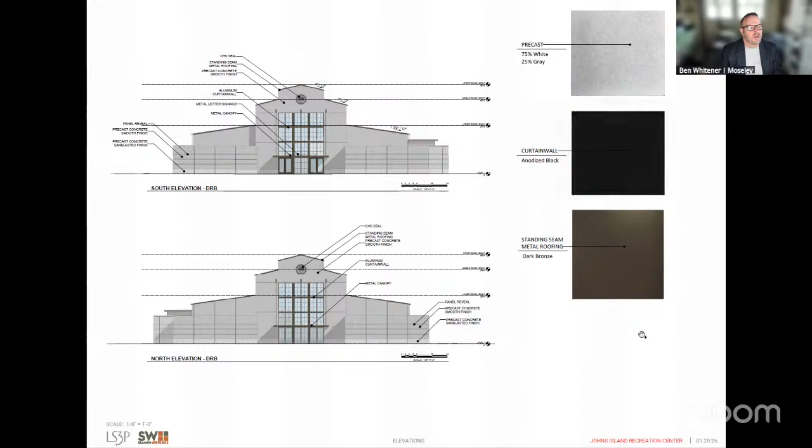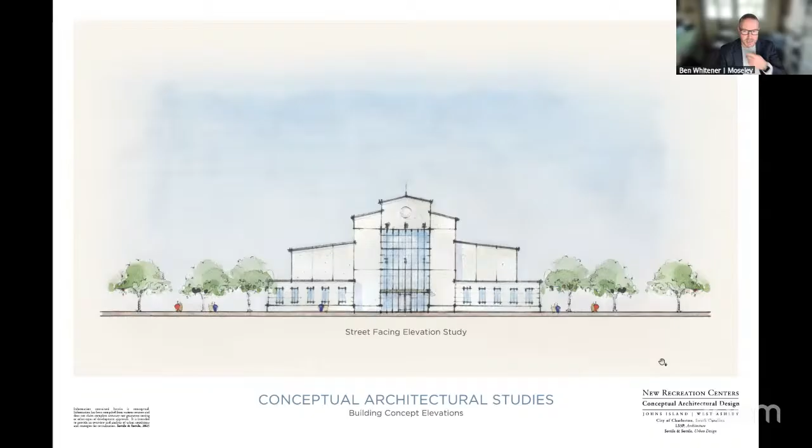So there are two questions with the windows. First, it looked like they've been removed, and I was curious if there was program behind those windows as to why they were removed. I couldn't read on the plan what that program space was. And then the second part, it looks like in the conceptual rendering they're no longer windows. Are they faux windows, or just a frame?

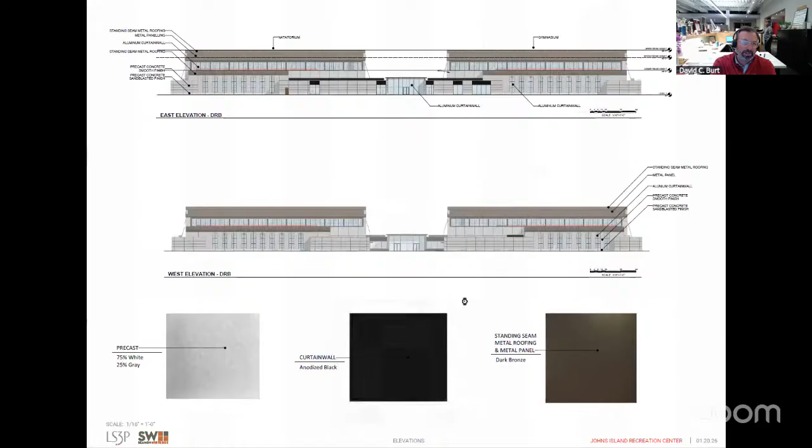Well, where they functionally make sense, we were putting them in, and we probably can. On these elevations, it's equipment rooms right behind them, it's where the pool equipment is located, so it's not something you really want to be looking in on. But in the entry courtyard, those are into programmable spaces, and those do have windows. So where there's more human activity, we can add them back.

So if you go to the rendering, the courtyard rendering, what courtyard rendering? Yeah, there you go. So those are windows. It looked like those are windows. No, okay, that's just a graphic issue. Gotcha, we can fix that. Those are windows. Got it.

That's it, thanks for asking that, Ben. I was curious about that progression as well. Also, on the general context, I heard we talked about the rural character and adding the trees and the capacity for the farmers market, but I'm curious about the building architecture itself. What are the elements that speak specifically to Johns Island? Yes, that would be great.

If I can tag on to that question you guys answered for Ashley, because that was one of my questions, is that I know you had a community drop-in, but I wanted to know what inspiration, because this doesn't scream Sea Islands to me. So I was just curious about the inspiration you guys received and the community input in regards to the design of it.

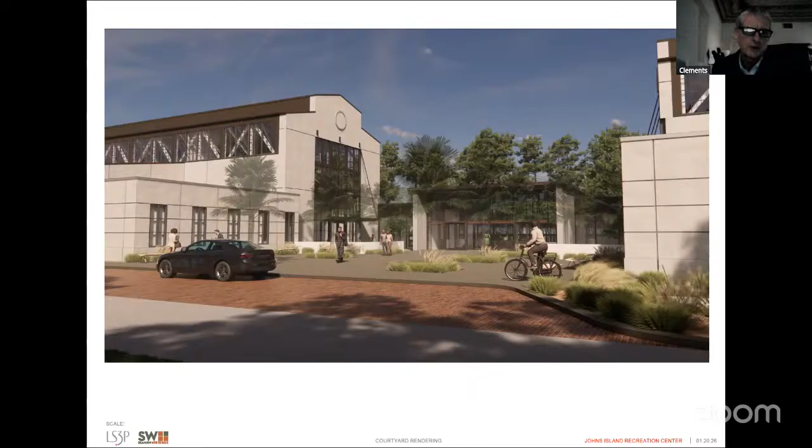Right, and the thing with this campaign of kind of a next generation civic architecture, we are really trying to distinguish between a municipal project that has a civic character versus the kind of vernacular architecture that is native to residential structures and other commercial structures. This is a city project, and it should be made to be very durable, enduring, a kind of permanent fixture. It's like when you put a church in a neighborhood, it's different than the houses that surround it, because it's a civic building.

So it plays by a different set of rules and a much more long-term, durable, permanent civic presence. That's kind of what the mayor's vision has been for a lot of these new buildings, to have a consistent civic image that is distinct and does stand out to some degree as being a municipal building, something that's a part of civic pride and shared identity. So it is not a vernacular building. That's kind of a given, by nature and by design.

Yeah, I mean, I'm not a design professional. One of the things we're tasked with as a board is ensuring the character of the neighborhoods in our purview. Using an example you referenced, the churches - churches on Johns Island look very different from churches in West Ashley or on the peninsula, for a lot of different historical reasons. And even in the context slides, we saw a lot of European examples for inspiration. Not that this isn't a beautiful building, but I struggle to see the context, much like what we talked about with the city's last project that came before us. While I respect the consideration of using materials that will last and won't cost the city more money, and I fully support that, there's another continent that this island shares deep history with that was not part of the conceptual inspiration. I wonder if this is the appropriate direction, sticking with one theme that speaks Charleston overall, as opposed to continuing to lean in on the unique characteristics of the different areas of our city.

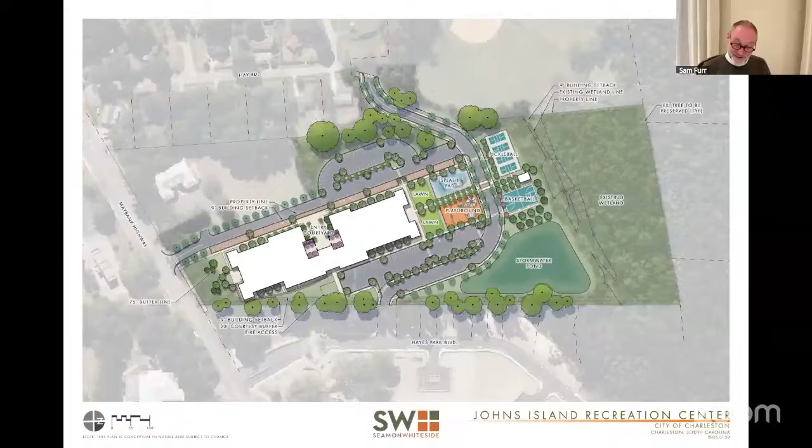On the entry courtyard, again, good civic architecture - it is amazing, I really like the building a lot. Where it has the low slope roof over the entrance, I think more traditional civic architecture marks the entrance a little more strongly. I love the transparency of it, but perhaps taking that low slope roof and adding a bit of a higher slope, or some sort of clerestory above it, to punctuate that entry, so it says entry very clearly architecturally. But that was my only other comment, thank you for your patience with me.

Great, thank you Sam. Are we ready for a motion? Go for it, I make a motion for conceptual approval. I'll second. All right, motion by Ben and second by Sam.

Any discussion? Not necessarily for the project, but for a broader approach: on this one we're voting tonight, whereas on a project at our last meeting we did not provide a formal vote because they had not gone to BZA yet, which is historically how this is run. I actually like being able to move projects forward if we know we have staff support for whatever they're requesting at BZA - I think that's a really productive approach. If the applicant wants to take that approach, I just think we should have consistency. So we're doing it tonight, maybe we need to continue doing it.

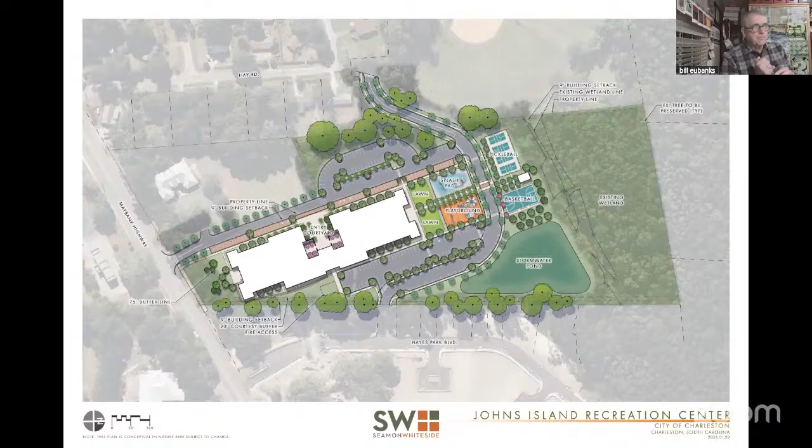Any other discussion before we vote? If not - Lucas, yes. Ashley, yes. Stephanie, no. Adriana, yes. And I vote yes. So the motion passes. Thank y'all so much.